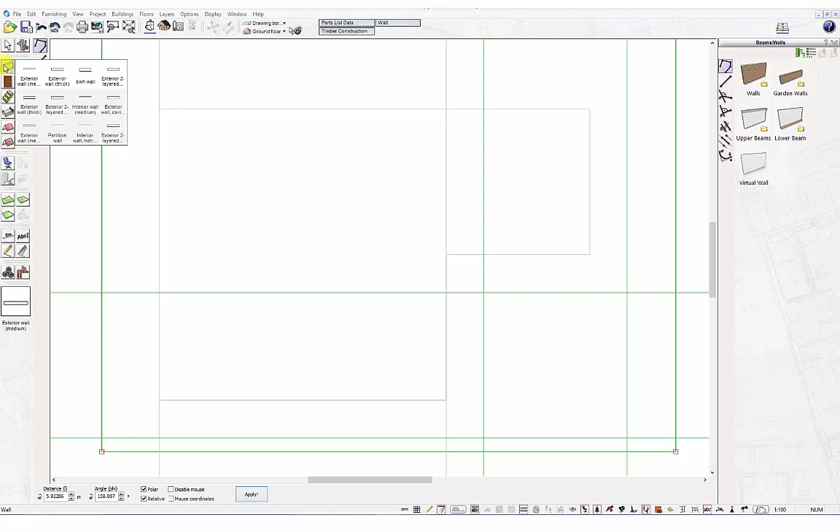First, left click the wall icon in the left vertical bar. This will display a number of different folders for walls and beams in the catalogue panel on the right hand side of the screen. Click the walls folder.

Depending on what version of software you are running, the predefined wall types in this video might be different to yours. However, the input method is the same. Left click an exterior wall type followed by the input method, polygonal walls. This input method allows you to insert any number of walls continuously.

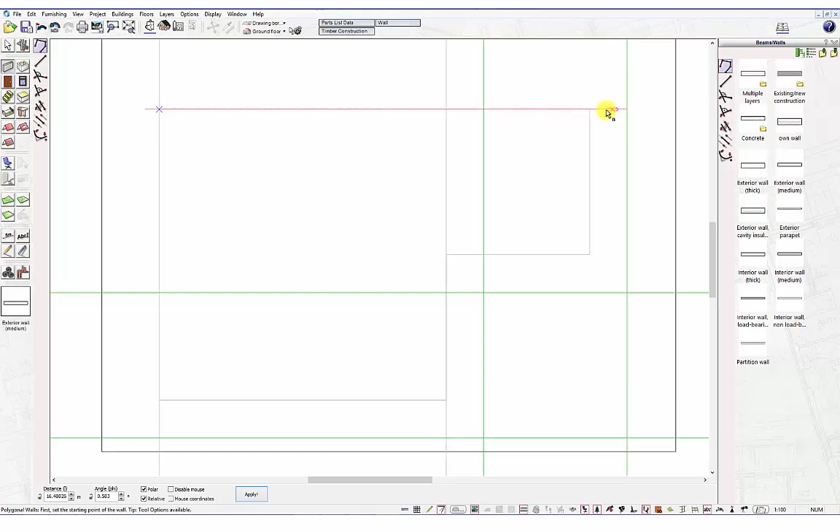In this next step, click the Tool Options icon in the top horizontal bar. These options determine how the walls are entered. For example, by selecting the option Do Not Group Walls, walls drawn continuously will be entered as single walls rather than grouped walls, allowing you to edit them individually at a later stage.

Walls that have been grouped together can also be ungrouped after they have been entered by clicking on a wall and then clicking the green ungroup symbol attached to a wall group. You can also ungroup walls through the Edit menu.

Now close the Tool Options dialog box and move the mouse cursor over to where the guidelines meet on the left hand side of the sheet. Snap to corner point and set the start point to the first external wall with a single left click. By default, you should snap to the corner point, but if not, you will need to turn on the relevant snapping through the Options menu.

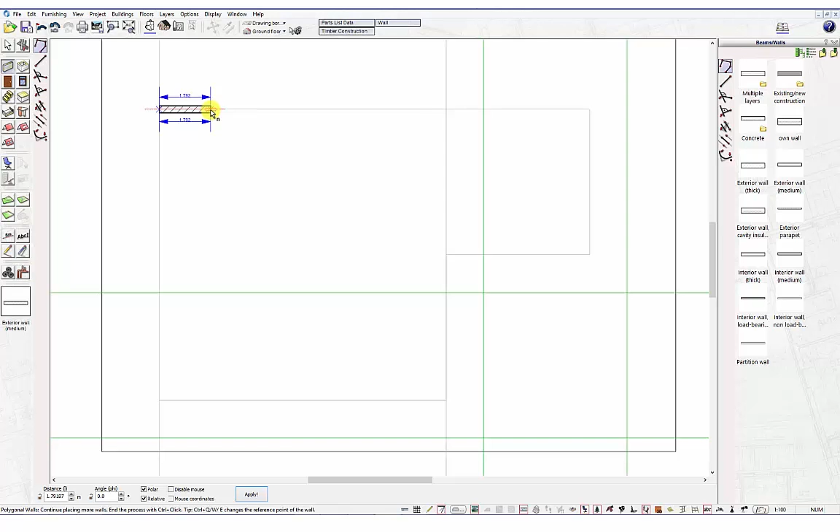Next, drag the mouse outwards to follow the horizontal guideline, keeping the wall snapped to it. The wall to be created is attached to the mouse cursor.

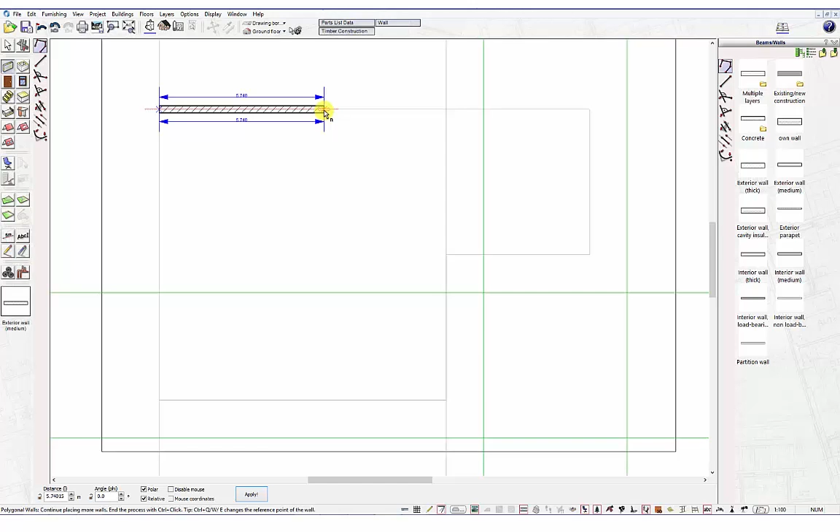Before placing walls in position, use the key combination Ctrl and W to toggle between the wall edges and wall axis. This lets you define which wall edge to place in relation to a reference point, for example the inside edge of wall, centre of wall, or outside edge of wall. Try pressing this key combination a few times to see the effect on screen.

Now use the Ctrl and W combination to select the inside edge relative to our room and snap to the corner point where the guideline meets at the other end. Place wall in position with a single left click.

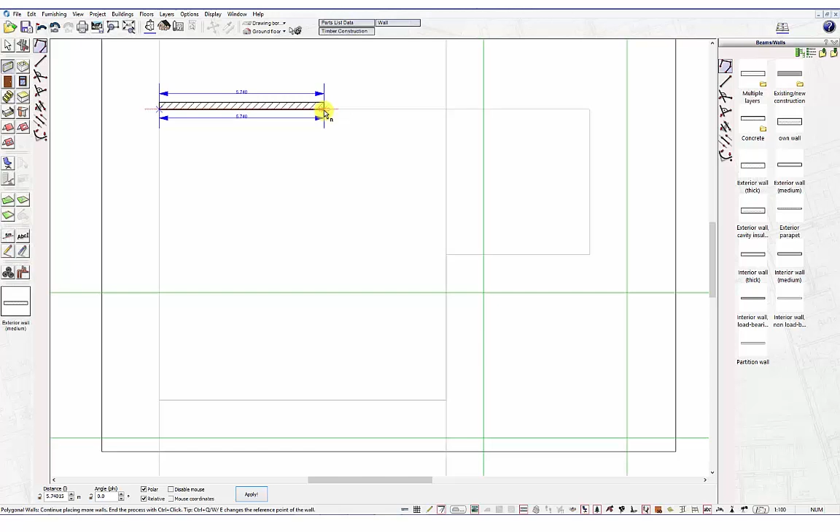Now move the cursor downwards, snapping to the next corner point and left click to place wall in position. Continue these steps until you connect the final wall to the start point, shown as a green cross at the end of the cursor.

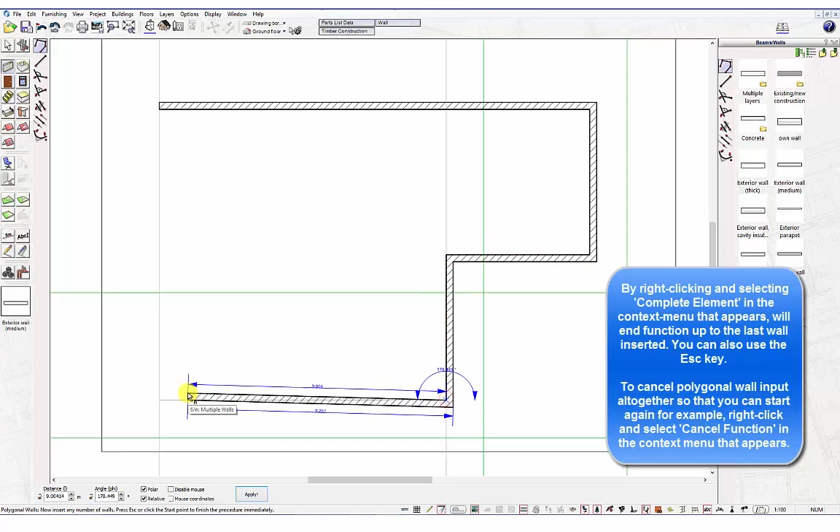You will notice that when your final wall connects back to your start point, the room is automatically labelled Room 1, for example. This is an important part of the checking process when drawing walls. The room label confirms that all your walls connect with no gaps or spaces to form a fully contained room.

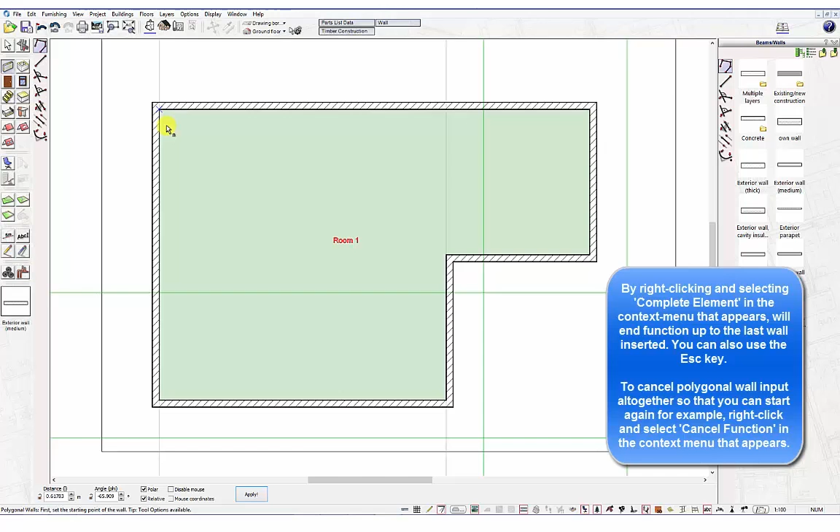Once walls connect like this, they form a room, which means that the floor is created. If the walls do not connect, then no floor or ceiling will be added when you create another floor. Automatic room labels can be changed to more meaningful names later on in projects.